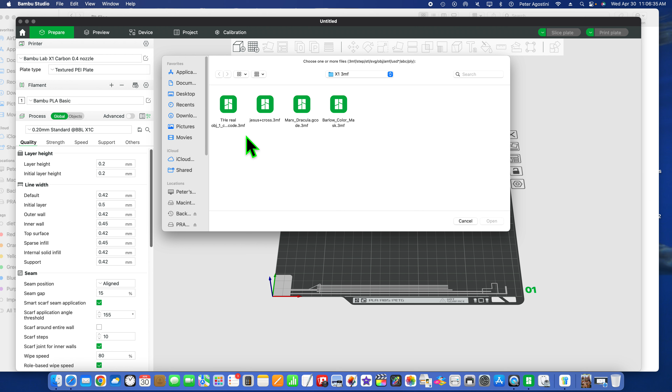So we got to go to prepare, got to go to here, go to desktop, go to screen, chess set files, and looks like there's a whole set right here. I think this is the queens, kings, and pawns. Let's open that up, let's see if we can open that up here.

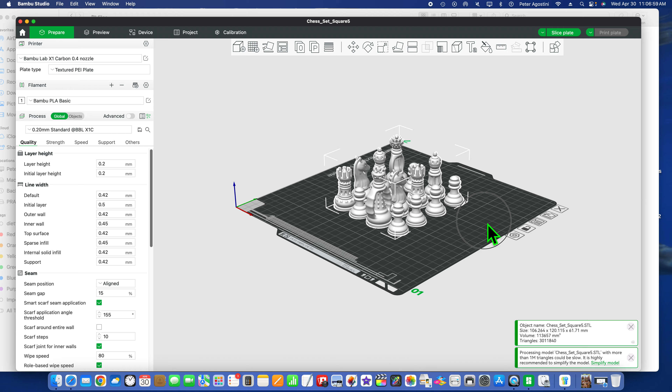Very good, here we are. There's a chess set. It says classic, so this is the classic one right here, David, that I'm doing.

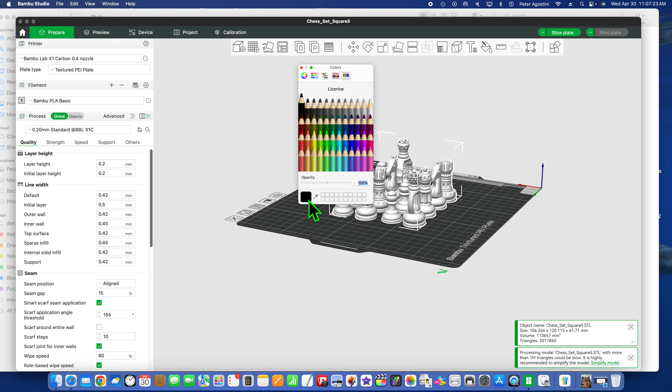I think we'll change the color to black, and we'll do that over here, go to black and change that color to black. I know it doesn't look good like that, but that's the color.

It could be red if you want red. Let's see what red looks like. Go to red. There's the red one, because I have red filament, so we're going to set that to red.

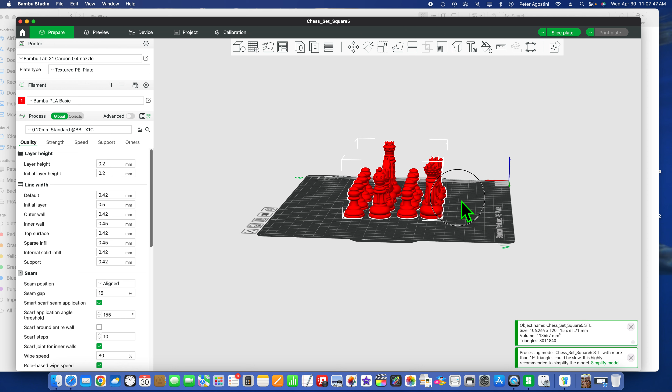And basically, let's see if we can slice this. Hit slice up here. If we get any errors, then we know we have to do something else to fix it. And I don't think we're getting any errors.

This will take about, prepare time is 6 minutes, printing time is 2 hours 16 minutes. That's not bad for printing, okay? And there it is there.

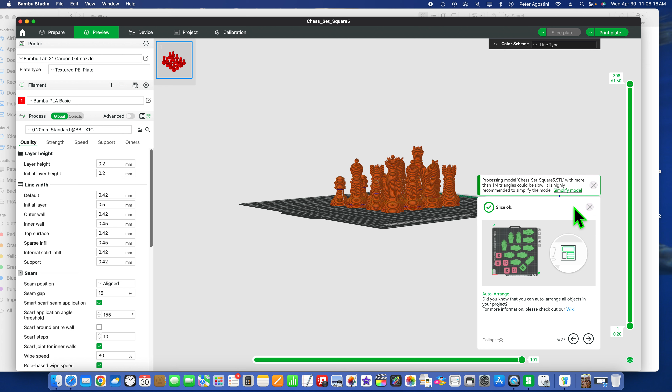Didn't get any errors, so we're going to save it. We're going to go up to File, and we're going to go to Export Plate Slice File, and put red in there for a name. I'm going to save it to the desktop.

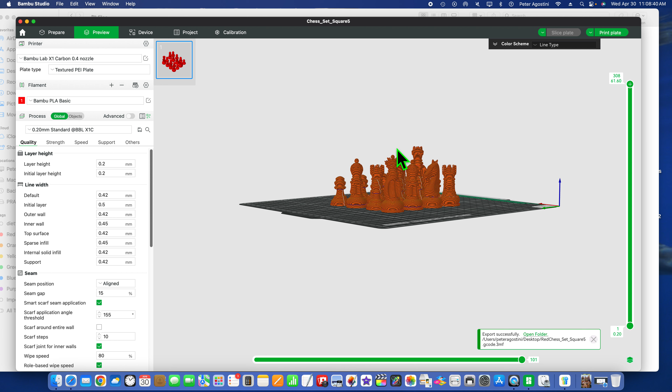And that's saved for future printing, so stay tuned for that. Hopefully we got this all here.